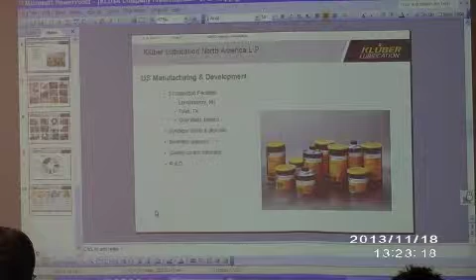Well, I just mentioned the manufacturing. We make just about everything: synthetic chain, gear oils, greases, hydraulic oils. We even are into refrigeration oils now with our Texas facility.

We maintain quality control on everything. Kluber is pretty much the Rolls Royce of the lubricants industry. We are a premium product, however there should be a cost-effective price, there should be a return. The reason our products are higher in price is we work only with the high ends of the raw materials. You get what you pay for.

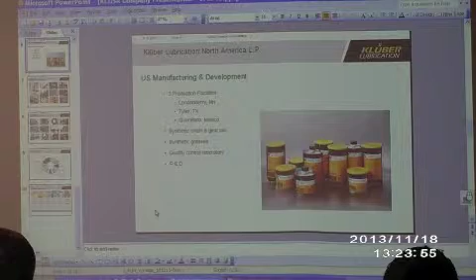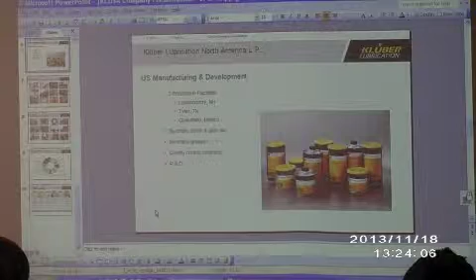We do everything by the batch process. We don't open the valve and wait until the tank truck's full; everything is done by a controlled batch. With that, they talk about the quality control lab. We keep a retained sample of every batch that we manufacture, so five years from now, if somebody has a question about the product, we can go back and review it fresh as the day it was made. We can keep track. So all that adds up into expenses, obviously, but there is a reason for that.

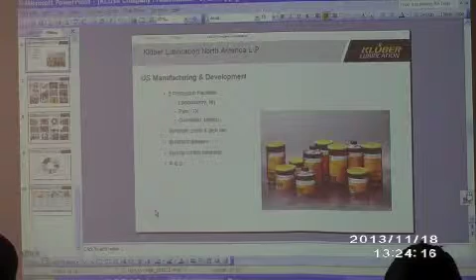Again, we're helping the customer, and I like to think of this as the problem solver. We're not going to solve all of these things, we're not going to go in and say we'll take 10 problems, but we're going to go in and solve problems. If a guy's having a problem, we stand on our reputation because of that. You're in there with bearings, bearings need to be lubricated - what can we do? So that's kind of a synergy we have here.

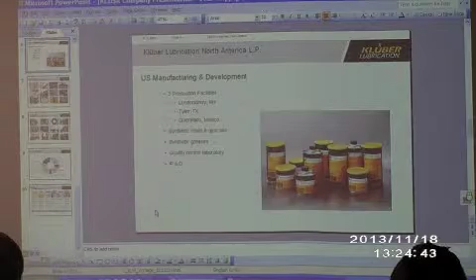All industries, I mentioned that - food, dairy, automotive, wood industry, we do quite a bit. Beverage, baking, candy, not sure what all those are. The wind industry is a large market for us now. We're doing a lot of work with the OEMs, heavy-duty applications like rail.

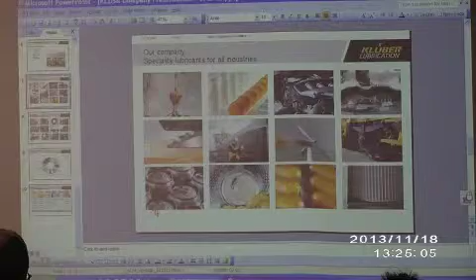All components again - compressors, chains, valving. We make assembly paste for things like screw covers and whatnot. We carry a lot of automotive OEM part numbers for assembly. And that's a misnomer too, an assembly paste - anybody can assemble. The real point comes up is, can you disassemble when the time comes? And that's where our products have proven out.

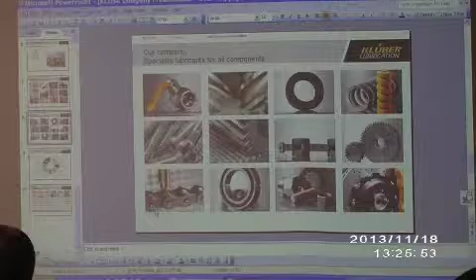Gearing, again there's another automotive application there - open gears and closed gears, springs. I think on the space shuttle we were on the Belleville washers, which preloaded the rudder - the spring washers, Bellevilles. One product, our All-Temp Kluber B50 assembly paste, was used there.

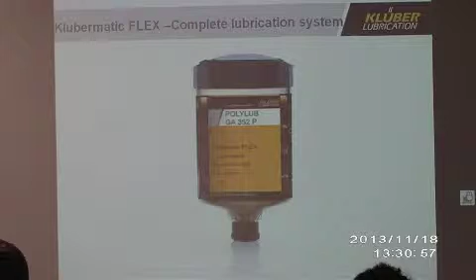But this is just a quick overview of the flex unit. And these are a product that's been hit or miss in the past. There are quite a few competitors out there. We like to think that this product is on the leading edge.

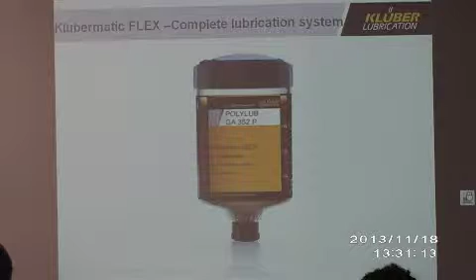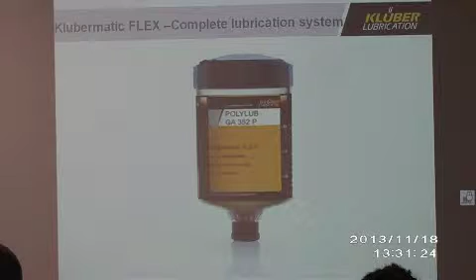These can be a boon or a bane. If the customer uses this product properly, it's going to save you manpower, it's going to give you better assurances that this machine is being lubricated. The problem is a lot of people will put these in and forget they're there. And a bearing will fail - 'well, that damn thing didn't work.' Well, it quit working six months ago, because you were supposed to be thinking about changing it. So it's something they do have to think about, but if you can free up the workforce, you're saving man hours.

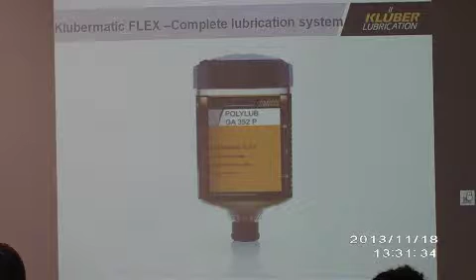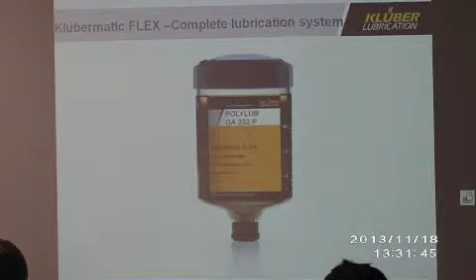They can tend to something more important rather than, 'here, take this grease gun and go around and grease.' And this way you can put the specific product in there. One of the problems when you give a guy a grease gun is he's going to grease the wrong lube point, or he's going to put the wrong grease in a particular lube point. This way, if a piece of machinery needs a certain lubricant, that's what's in there.

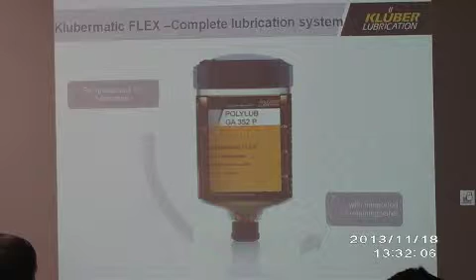Is there any way of telling when it's dead? It's transparent, you can see as it goes down. And you can set the timing - if you say six months, mark the calendar six months out.

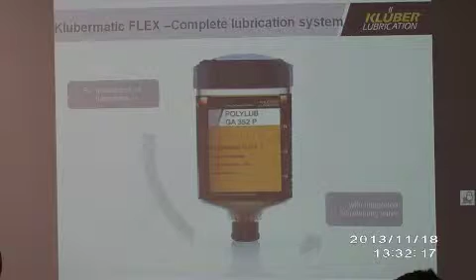Some of the other ones are fully electronic. This one is pretty basic. What this does is generate a gas through electrolysis, which generates gas that pushes the piston down. What you see on the side there, the tan color, is the grease. Let me bring the color over.

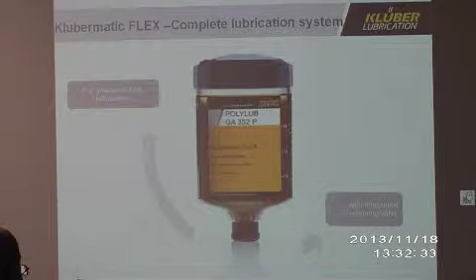That's okay, I've got an SKF one out there. You've got a plunger in there, and the gas expands and pushes against the plunger, which is sealed, and pushes the grease out. You can mount these up to about 6 feet away from the lube point.

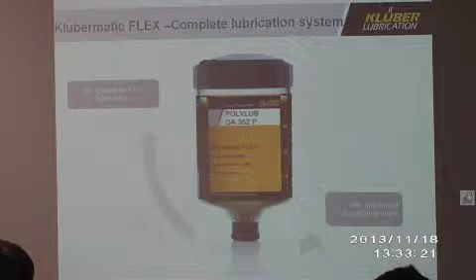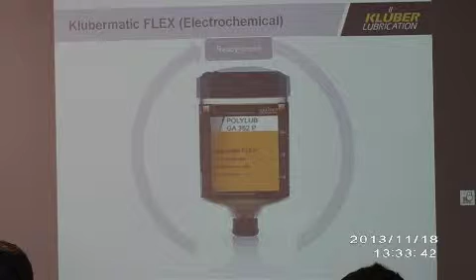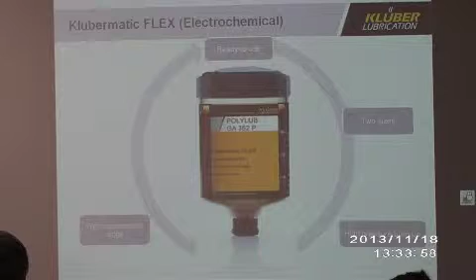These are disposable, they are not refillable. Once they're done, we change them out. There are two sizes - the 60cc, which is the small version, and this is the 125. It has a high pressure buildup, I believe it goes over 100 PSI, and a high temperature range - up to, like I said, 120 is where you should protect it against that. It's also compact, which helps for many application areas.

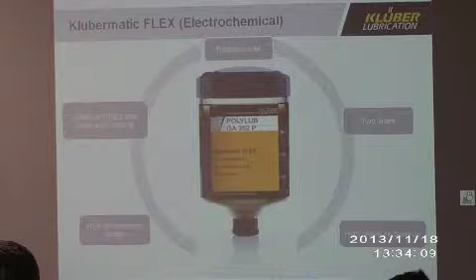There's the cutaway, so you can see the piston - batteries are up top, the electrolyte is in here. When it's energized, it creates a current, which creates gas and pushes that down to the discharge.

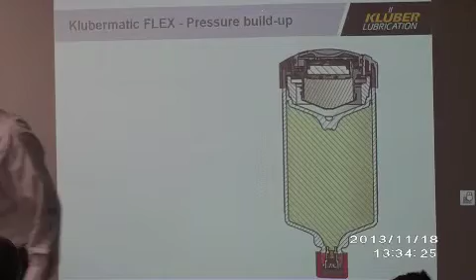What's the maximum setting on these? What's the maximum time? 12 months. 12 months.

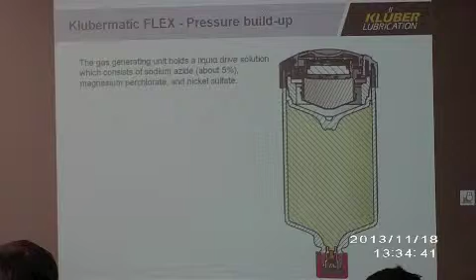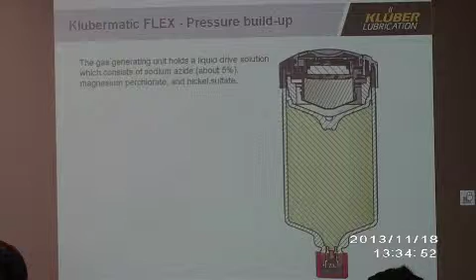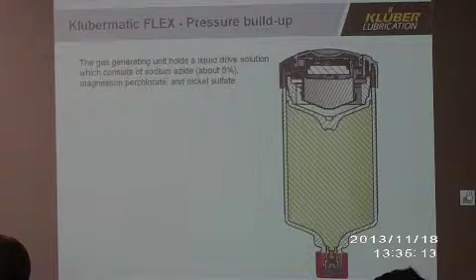The thing about lubrication - one of the issues is, you give a guy a grease gun, once a week he goes out there and greases. So now you've got plenty of lubrication, but as the week goes by, the amount of lubrication goes away, and then he greases again, and then it drains down. Maybe he's a little late and it gets down below what you need, so the bearing's starved a bit, and then he greases. Maybe he greases too much, so now you're going to get heat generation if the speeds are right, because he's got too much grease. What this does, by putting out a little bit at a time, all the time, is maintain a more constant lubrication level, which is better for the operation of the bearing.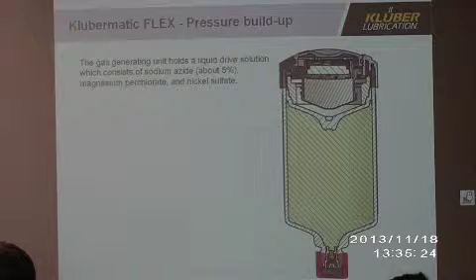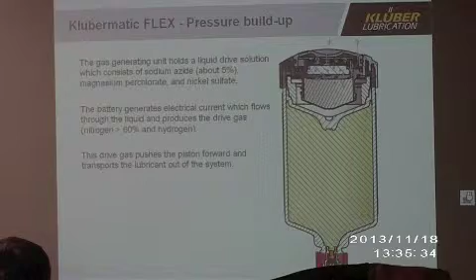I already talked through that. I'm not a chemist, so I don't try to explain what's going on, other than it does generate a gas which pushes the lubricant out.

It is temperature compensating. That was one of the problems with some of the earlier gas-operated units. When it got cold, it quit making gas, so it quit lubricating. Or if it got hot, it made more gas.

This is dealing mostly with the equipment. Again, key point, you can turn it to any setting you want, 1 to 12 months. This is the basic unit here.

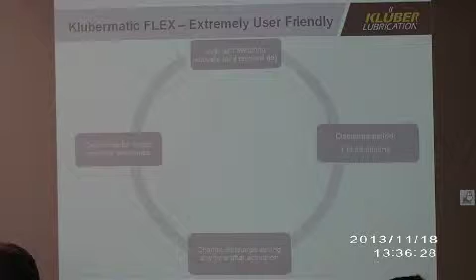The advantage of this one is you can shut it off. Some of the earlier ones, I don't know if you've seen them, had a little lever on top. You twisted it and that broke it off, which activated the chemical propellant's production. You can't shut that off. This one you can go back and turn it off, so you can turn it on and off.

In the brochure, it gets into some of the other areas. We go as far as PLC controlled units. They can run with the machine, so you can completely tie it into the machine.

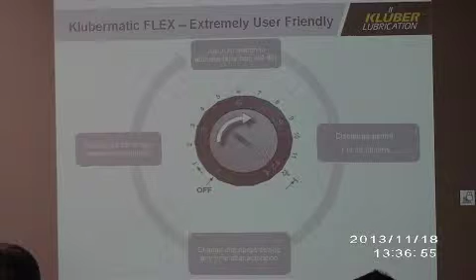Again, this is a foot in the door, a basic application. Could be a good thing for quarries, conveyors, things like that. And that's the point we're talking about - off point, as much as 12 months.

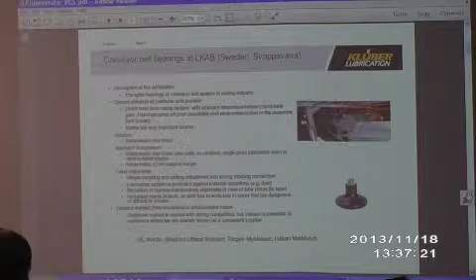I will not dwell on this one much, but they do value case studies - proving the worth of the product with examples. This is from Europe, obviously you can see Sweden. There's an application right here - a permanent unit mounted on support idlers for conveyors.

I think the next guy in is going to be doing two idlers, so there's a new point there. This is that cup I mentioned for severe duty vibration. Basically, it's just a support that the unit can sit in so that it will last longer.

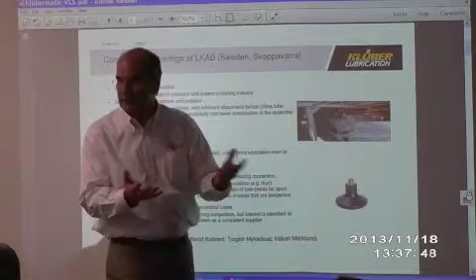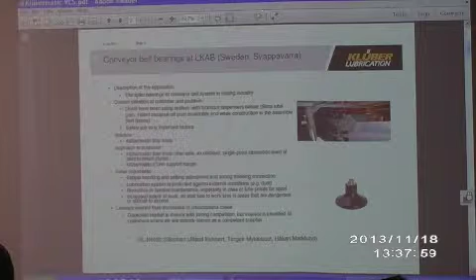So it's accepted by your pharmaceutical - yeah, you're covered. NSF H1, NSF is the controlling body now that rates products as being safe for use in food plants.

The old way to think of it was H1 would be above the food line, so in case some fell in, well, not a real problem. H2 is safe for use in food plants, but should be below the food line, so that it can't come into contact.

There's now even a 3H, which we have some products for - the baking ovens, pans for Hostess and things like that. It's the lubricant for the pan conveyor, and it's also the lubricant to release the baked goods from the baking pan. So we can go that way too.

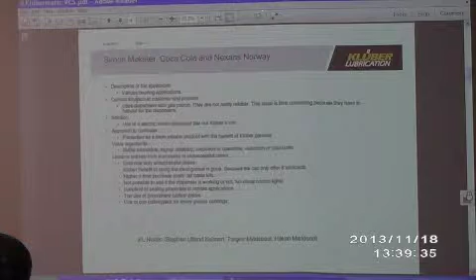Ring bearings, washer bearings, not sure what that application is there. Electric motor bearings - this is something else you can set up. Obviously you've got to be careful, you don't want to overlubricate, but this is another way of making sure these bearings are being lubricated.

Pelletizer machines, these wood fuel pellet makers - there's an application they're using there on chains, so they're using oil for chain lubrication. Right, it's very important.

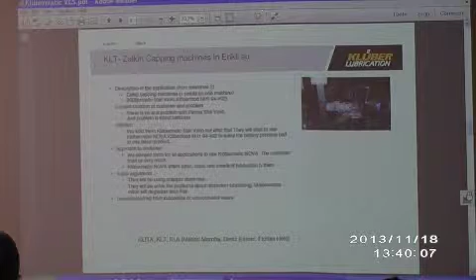Another food industry application, Zalkin. Zalkin is one of the main capping machines - it puts the lids on the beer cans, puts the lids on the Coke bottle.

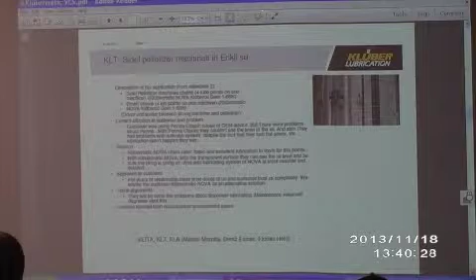We're using in there Kluber food NH19442. Let's try that again, guys, sorry.

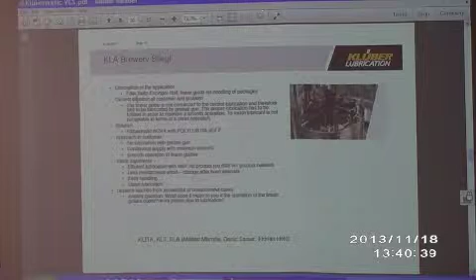Gas scrubber, CO2 - so this is going to be bearings, scrubber application. Breweries, the German company - we're linked up with some of the breweries. This is the filler line, using Kluber bags on package and bottle.

Basic part I brought that in for was number one, the conveyors, and just to give you an idea - Nestle is a line using the Klübersynth UH1 14-222, which is very similar to that. General bearing lubrication - this is European, in the States you can use the Olaplex.

The Olaplex is less expensive, and we've got a good history. How long have we been selling it? First month you brought it into the country, it's been going 45 years.

Anything at Turkey Hill that is grease lubricated is Olaplex FMG2. At Kunzler, the biggest use, they actually smear the FMG2 on a big stainless steel table, and when the hams come out of the smokehouse, they slide the hams across the table. They buy it 400 pounds at a time. I think we charge them a pretty good price.

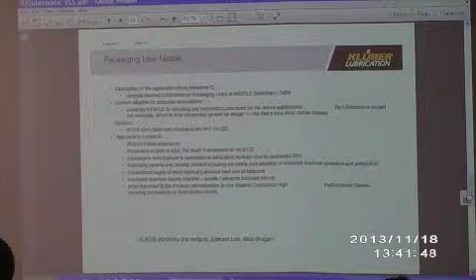They were using NBU 15. No, for that they were using Fuchs first, and they ran out. They use NBU for some other stuff over there, for hot dog machines.

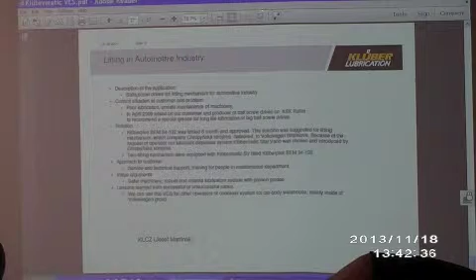That goes down that list there, so.

For the heavy industry, this could be a good starting point, because they're always short of people. Today more than ever, it's lean and mean. Nobody has time, or unfortunately you have a guy that's the greaser and he's the new guy. A lot of times they don't take that job too seriously, they go out and sit down somewhere. So there's your machine not being lubricated, or you wonder why.

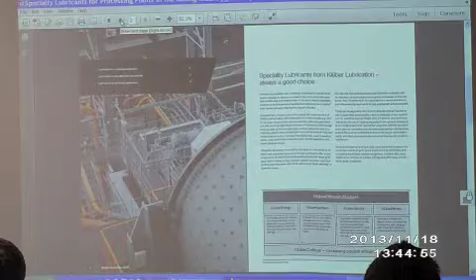Just to give you some ideas of different services that they offer, not so much, we're looking primarily for you guys, we're looking for product applications. This is a quick overview. Again, we can deal with the roller bearings, gearboxes, you name it, we have products that are covered. There's a sheet behind that, and another quick investment sheet.

I don't know where to start here, depending on the applications. What is your focus point with this quarry? You are working primarily at the quarries, correct? So it stays on here, is it?

Glenn and A Ray would know what our major applications would be for grease. Globally it would be open gearing, gearboxes, and bearings, roller bearings. I think that about covers it. That's pretty much everything that moves in the car. I was just thinking about motors.

Guys, Reggie and I will work you up a cheat sheet on competitive greases, the Mobil SHC 100s, the popular extreme pressures. We'll have something to compare to.

Since you brought that up, Smitty, I have one customer, Independence, they have what, 15 facilities. They have standardized, and they swear by Mobil XHP 222. It's just chicken fat, don't worry about it. I assume XHP means chicken extra fat, heavy petroleum. They're buying it cheap, it's a 220 gear base on it, with some additives, some EP additives.

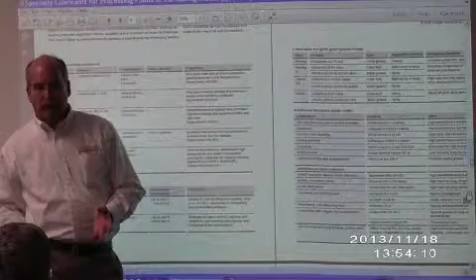With pitting gears, you lose your loading factor because there's no surface supporting it, which gets into a severe cycle and leads to quick gear destruction. We can actually, through a controlled process, smooth out the gear surfaces to increase the loading capability by having more surface contact.

This is one area that's gonna take a lot of time. If you're into open gears, it's gonna take a lot of effort at it.

Additional lubricants for main gear drives — again, here we're back to gear oils. Staburags greases, you'll see them used in the food industry, H2 product, amusement parks. It is a very complex grease, very water resistant, so if you're in an aggressive environment it's a great product. Good load carrying capability, not a great speed product because it's so viscous and adhesive, but it resists water washout, and it also tends to plate out and offer excellent corrosion protection.